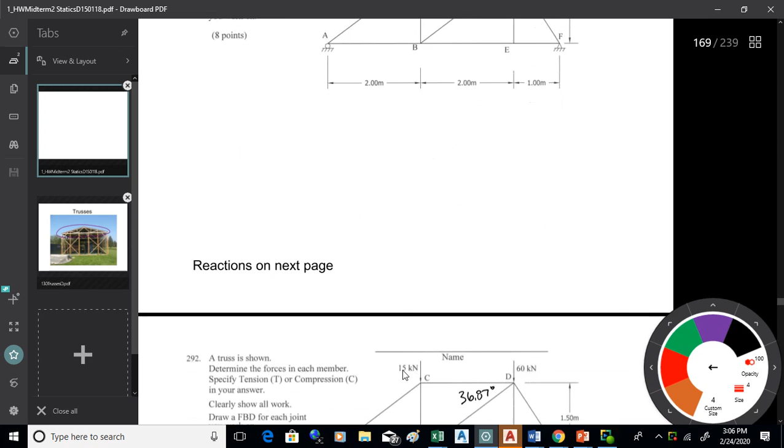So we're doing trusses. Now these things, they take a while, so be sure that you can work through these. You'll need to spend a bit of time on these, they just take a little while to work through. So the homework was 292 and 294. Why don't we start with looking at these.

Now, do we have any questions on these generally? What we want to do is work through these and solve for the forces in what are called the truss members, those long, narrow struts there that make up the truss. That's what we're doing.

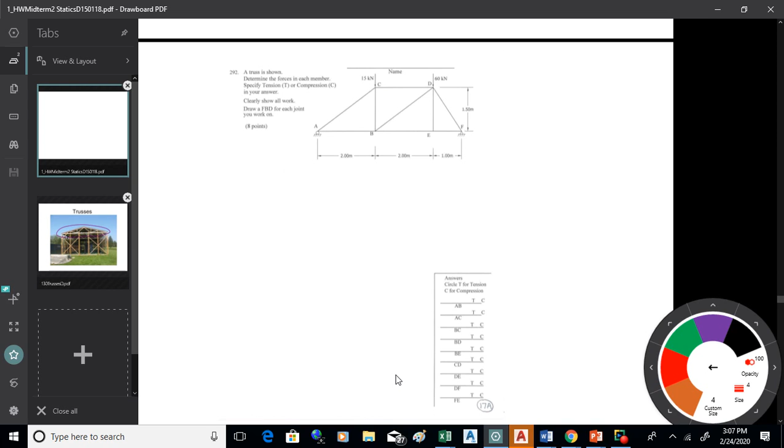So, 292. Now, I would like you to do it on 292 and fill in the answer blank down in the lower right. I need everything, all the answers listed in the order that I show there in the answer blank. Okay.

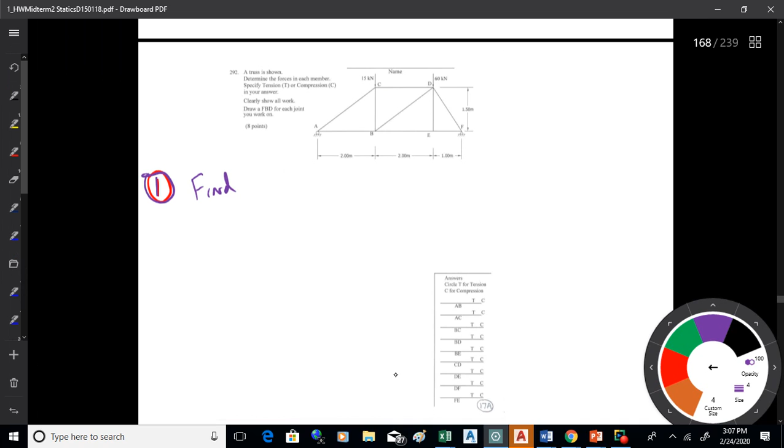All right, so how do you do a truss? Pray tell. Step the first is you find the reactions and the angles. Okay, so that's the first thing to do. So you treat the truss as though it is one object, and you want to find the reactions, in this case, at A and F.

And you also want to do the trigonometry. Usually you use arctan, the inverse tan, to find the angles. So that would be the first thing to do. So do we got questions on that bit?

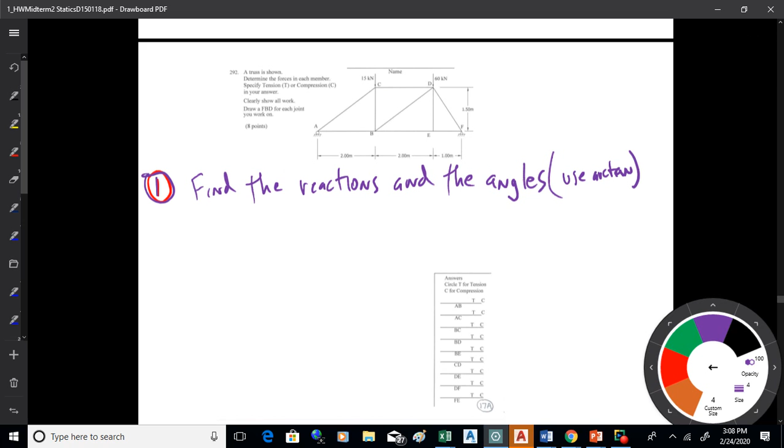Could you go over when it's compression and tension? Yeah, sure. We could have a look at a couple of these, okay?

So what I would do on this, I do the arctans. I've got two of them. I've got one that's a ratio of 1.5 to 2. That would be that angle CAB. And then also DBE. And then also I've got another one that's a ratio of 1.5 to 1, which is angle DFE.

So I get those angles figured out, and then I treat the truss as one whole object, and I find the reactions at F and at A. So sum of MA equal to 0 would be 15 kilonewtons, 2 meters clockwise, so that's negative. 60 kilonewtons, 2 and 2 makes 4 meters clockwise, negative. 2 and 1 makes 5 times RFY, so RFY is 54.

And then sum of FY will get you the other reaction. RA is 21. Okay. And then sum of FX is 0, so that's RFX. Questions on that?

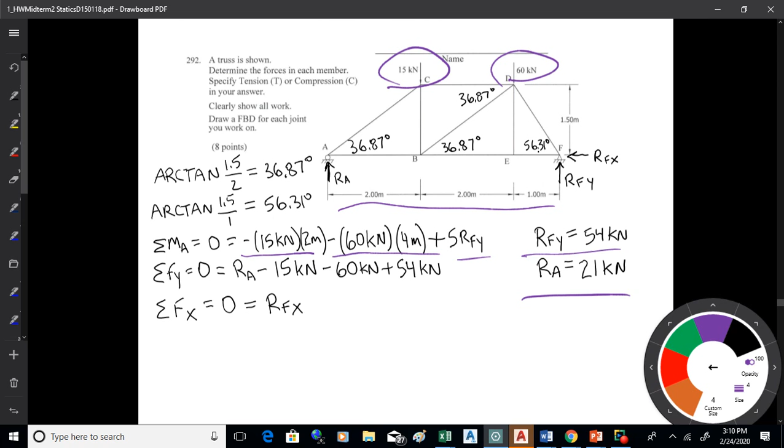Okay. So I went to F. Once I have the reactions, I'm going to go to F. What I have there is I have 54 up, that's the reaction, and I've got 2 unknowns, EF and DF. So I'm going to look at those 2 unknowns, EF and DF, and realize there are 2 of them in the X direction. Both EF and DF have X components. Only one of them has a y component though, and that's DF.

So I would solve the y equation first. 54 up, as I have it drawn down and to the right, sine, because that's the opposite side. So sine of the angle will get me that component, and I'll just transfer it over here. So the y component of DF is down, sine 56.3 times FDF. I can solve for FDF. That'll come out to be 64.9.

When I do that, it's a positive answer, so it means it does indeed push on the joint. And then after I've got DF, I can go sum of FX, set that equal to 0. And what I will have then is EF to the left, negative, plus cosine of the angle times what I just found DF to be. So I'll get EF, 36 tension.

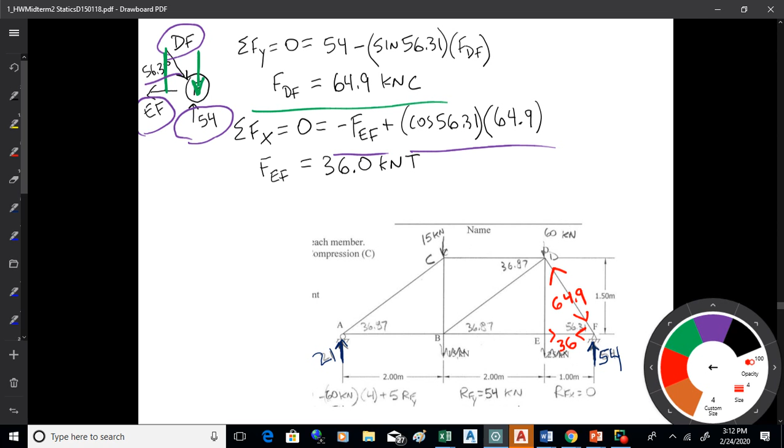So now I can go to another joint that has two unknowns and known forces. Okay, I went to joint E. Sum of FX will get me that BE is 36 tension. So that's pulling on the joint, so I mark it like that. And sum of FY shows me that the only unknown in the y direction is DE, so that's 0.

And then from there, I can either go to joint D or joint B. I'll probably go up to D because it has two unknowns, whereas B has 3. So I'd go up to joint D. Okay.

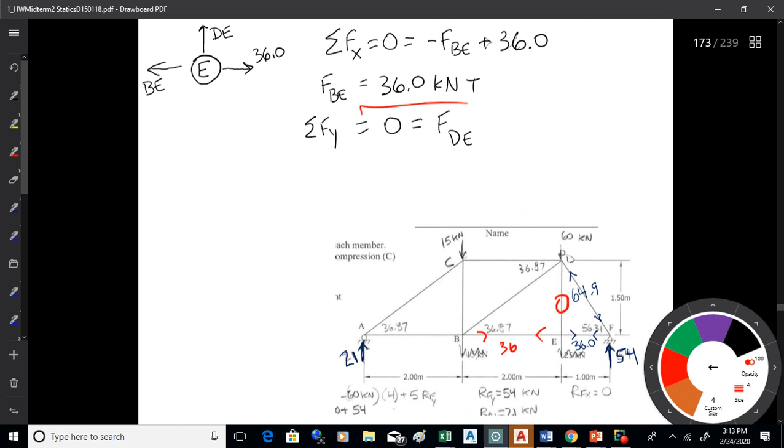So we good with that? That's the process for these. Okay.

So I'll go up to joint D. I'll do sum of Fy, set it equal to 0. 60 down, sine 56.31 times 64.9 up, plus sine 36.87 times FBD, the unknown. What I'm doing there is using the sines, which are the opposite components, to get those forces, but I put them right at D. It's like I just slide them over from where I show them on that right triangle. I'm using the sine because it's the side opposite the angle. So I'm getting 1 down 60 and 2 up, sine 56.31 times 64.9 plus sine 36.87 times FBD.

I can work through and solve for FBD. It's 10 compression. Once I have that, I can go sum of Fx, and I'll get FCD plus cosine 36.87 times 10 for FBD minus cosine 56.31 times 64.9. So the positive ones are FCD to the right and the cosine 36.87 times FBD, which I know to be 10 now. The negative one is the 64.9. I can solve for FCD, and that comes out to be positive.

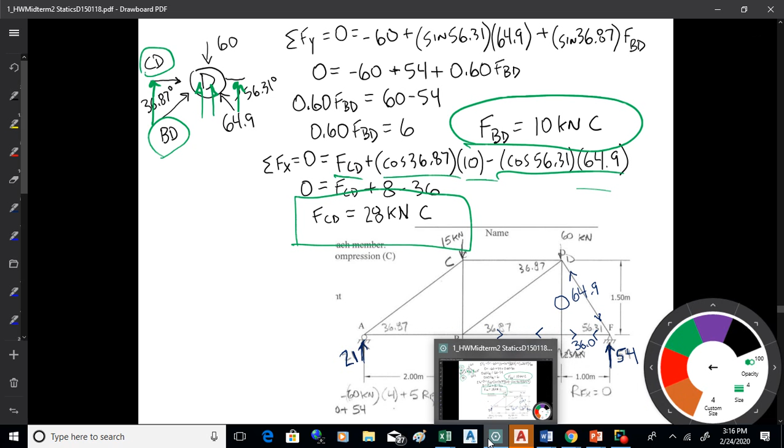Okay, all right, why don't we find somebody that we could work with here, and let's just be sure we can do this. So let's head on over to page 17A, where I've got a picture at 291. So page 17A, do you have that?

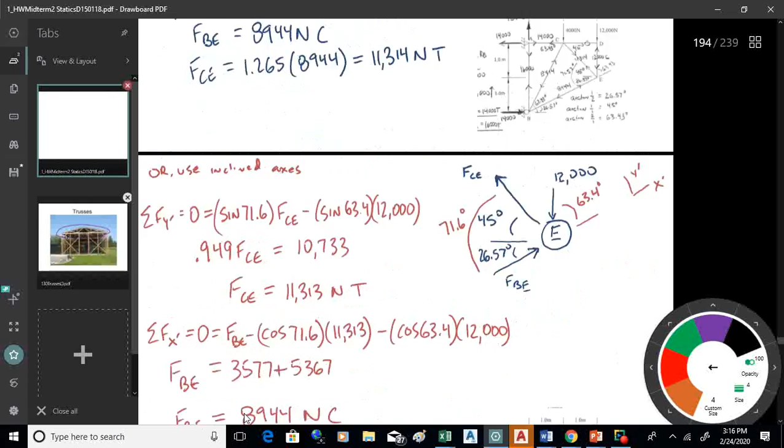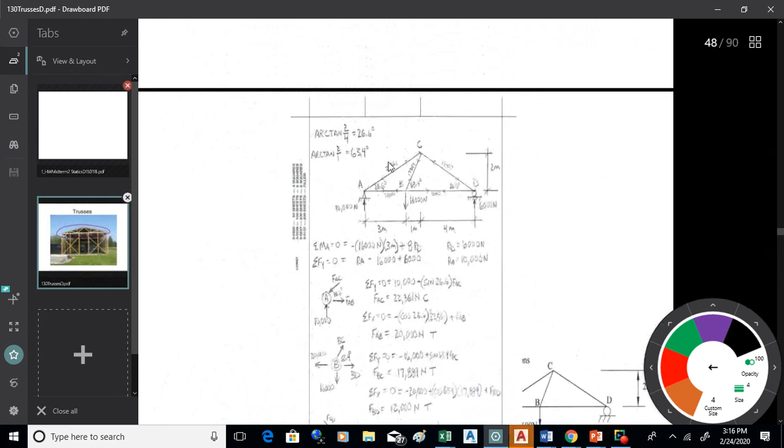Okay, so there it is. So what are the first two things you do with that truss? Find the angles, and what else? Find the angles and find the reactions.

Why don't you just find somebody you can work with and see if you can get them. So find the reactions and the angles. That's the first step. All right, so find the angles and find the reactions. That's the first thing to do.

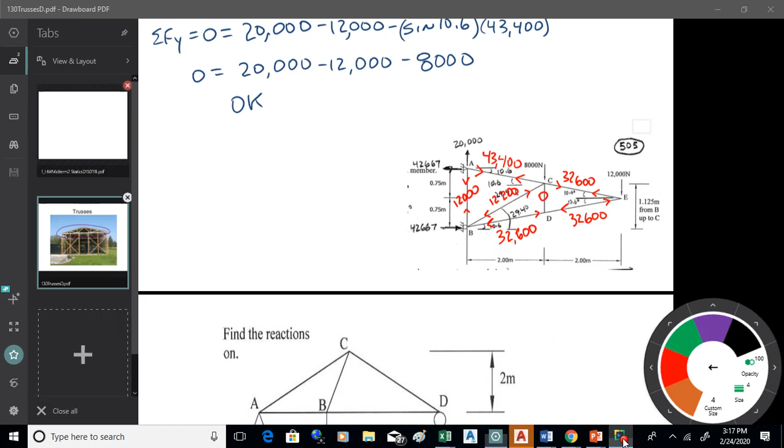I'll pause the recording so you could just work through online. Maybe pause the recording yourself, work through and see what you get, and then you can check in. So there are the angles, okay?

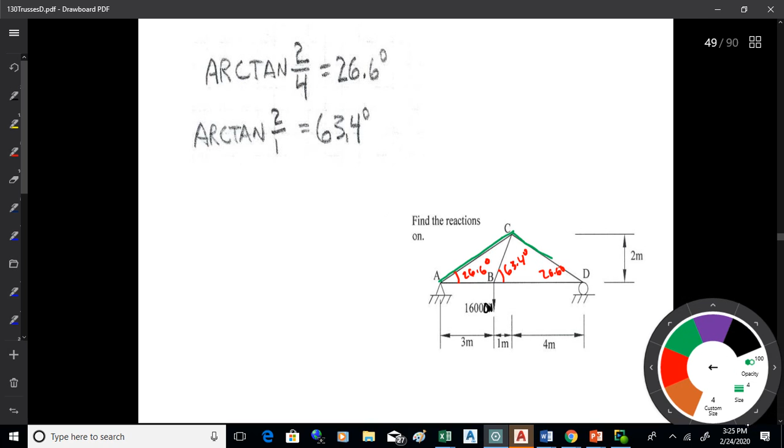There we go. Okay, reactions next. What are you doing all right with the reactions? Okay, so when you do the reactions, you treat the truss like it's one object, which is what it is, okay? So for reactions, you're just treating it like that. It's just one thing. So you want to find these reactions. Okay, we good?

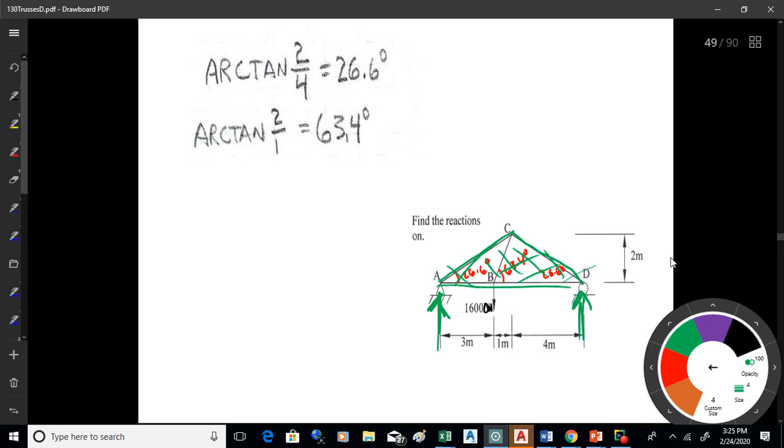Yeah, for that, it's a frictionless surface. Okay, so the only force applied here is normal force.

So once you've got the reactions, then you start in on either one of the joints. You want a joint with only two unknowns. You could use either A or D, either one. Okay, either joint is fine.

Okay, so we get those reactions. And then you start in on one of the joints and draw a free body diagram of a joint that has a known force and only two unknowns. You can use either A or D. So that'd be the next thing to do, would be to go to one of the joints. Okay.

Oh yeah, you did say that. So you can do either joint you want. The way you start these is you write out the letter of the joint. Let's say D, draw a picture. 6,000 up, I see CD and I see BD. So if that's CD and BD, I need an angle in there, and that is what, 26.6? So there's a free body diagram for D right there.

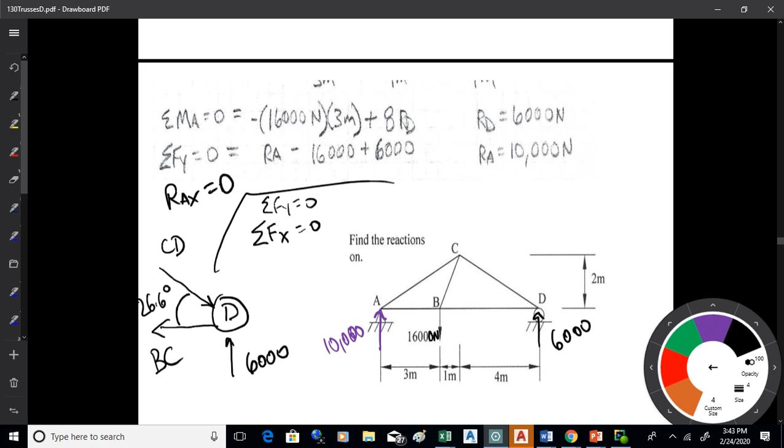Now, when you do forces, they've got to be in a given direction. So it's got to be sum of Fx equals 0 and sum of Fy equals 0. That's the equations you write. Remember, we're doing vectors here, they act only in certain directions. So when you write equations, you want all the x components in one equation, all the y components in the other. Okay? So we good with that? We got any questions on that? All right.